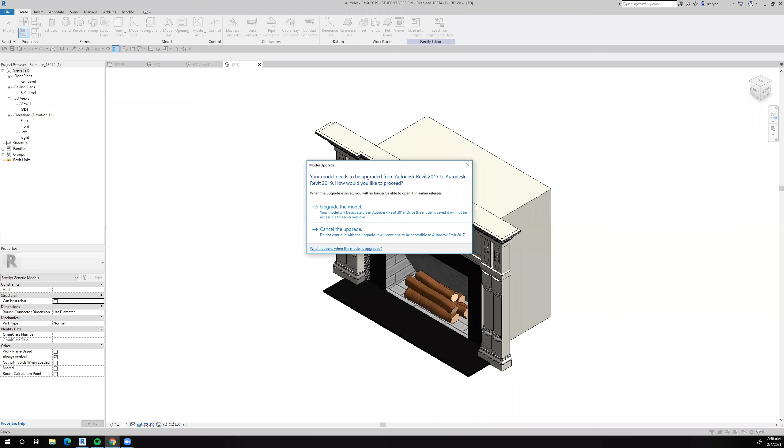And so Revit opens up the model and gives me an opportunity to look at it. And it looks pretty good for a fireplace. It has some nice detail—some logs, firebox, hearth, mantle, and the firebox itself, which looks pretty good. I like that. So I'm going to say load it into the project.

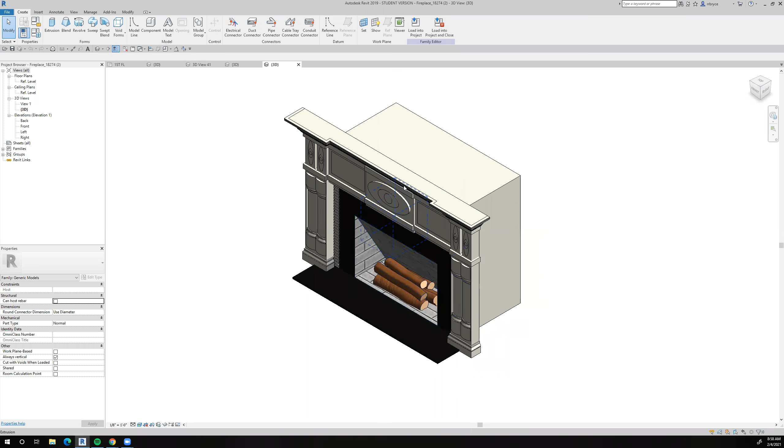I have a couple of projects open, so it's asking me which one I want to load it into, and it's this one, so I'll say okay. And Revit has automatically uploaded it and upgraded it. And now I have it available to put into my project.

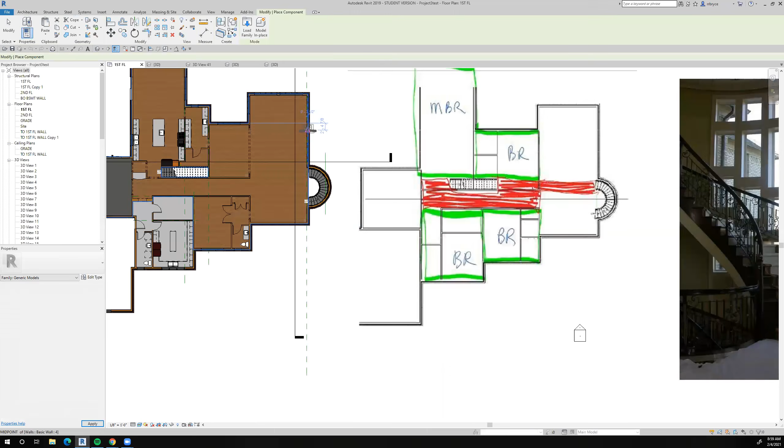So I'm hitting the space bar just to flip it around. And it looks like, well, it's backwards. So I'll hit the space bar again and again. That looks pretty good. Now, I think that's about where it's supposed to rest. I can take a look at it later to see.

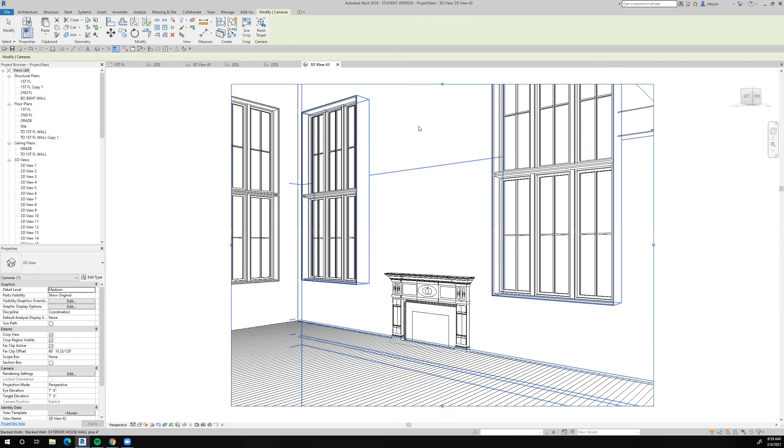So I'm going to take a picture. Let's see, I'll just come over here and grab the camera. I just want to check what it looks like right now in my model. Looks pretty good—I'm happy with that.

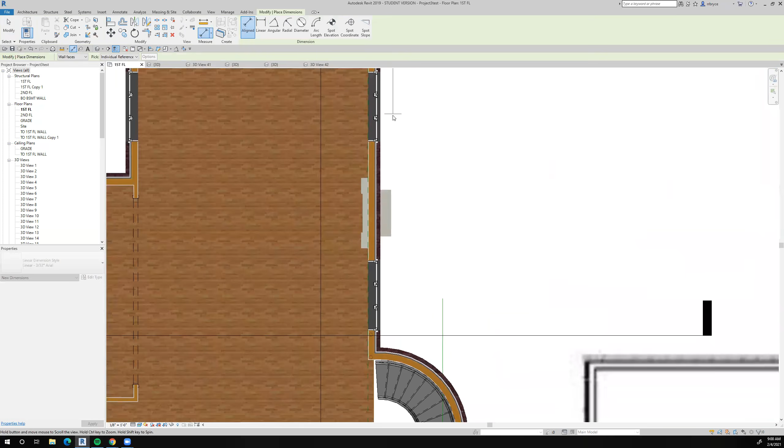I doubt that it's perfectly centered, so I'll go back to the first floor and decide where I want to center it. That's a good question on what I want to use as my point—I definitely want to use this as a point, and I want the midpoint of this guy. It should snap to the midpoint.

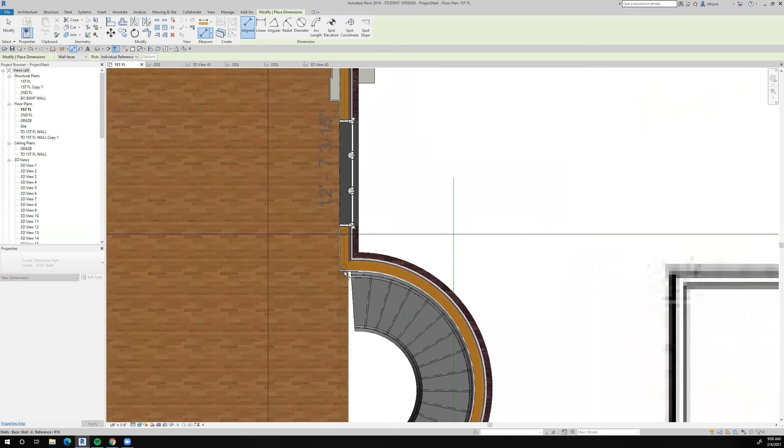It does. And now my question is, well, where's the other part that I want to use as a dimension? I think this might work right here as my other point. And I'll click there and say equal. Now my fireplace is equally centered between the—that's probably not right though.

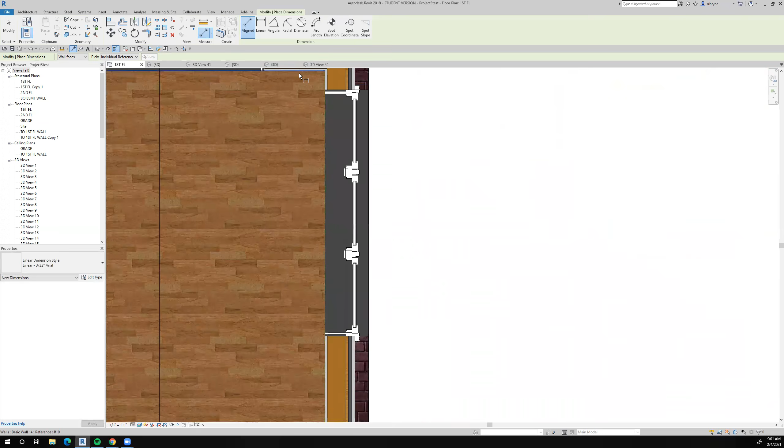I should probably do it from the inside. All right, so I'm going to delete that. And when I say the inside, I'm going to dimension from the inside face of the wall, because I want it to look centered on this wall. So that might be the better place to do it.

And then say, I'm looking for the equal. Sometimes it's hard to see it, but it's right there. All right, it's equalized—you can see the dimensions are exactly the same. Revit starts out by showing the EQ in the dimensions. You can see that. And if I want to actually see what the dimensions are, I click that little equal button again, and it shows me the actual dimensions. I can see that they are equal.

I'm going to—you notice on my cursor I have an icon that looks like a dimension, and that is telling me Revit is expecting me to put some dimensions in, that it's using the dimension command. So I'm going to hit escape to get rid of that. Now you can see next to the cursor that it's gone. Then I'll click on this guy and delete it, and everything looks good.

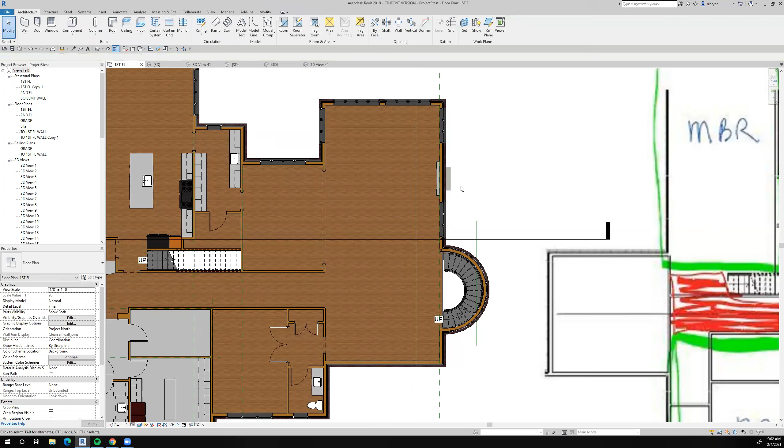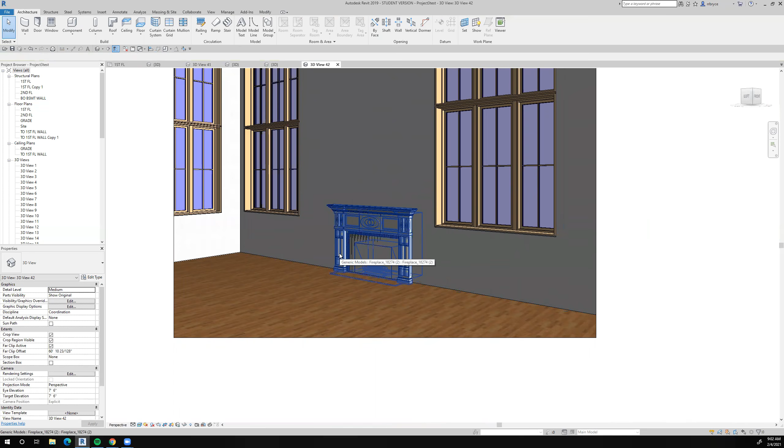From there, back to that 3D view. Now it's perfectly centered. It didn't cut an opening, I don't think, so I'm going to have to do that. Realistic—yeah, you can see that when these, most of the downloads from Revit City are not necessarily made to Revit standards.

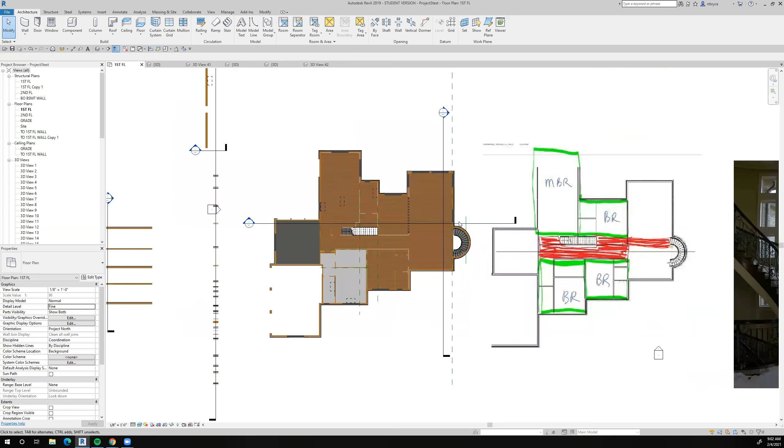So it would be more appropriate to have this fireplace actually cut the hole. You know, when you put a window in, it cuts a hole in the wall, and when you put the fireplace in, it cuts a hole in the wall too. But it's not doing that this time, so I'm going to go back to the first floor. I have this section right here. I'll go to that section and say go to view.

You can see that the gypsum board of this wall is going through the fireplace, so that's not going to work. So I'm going to click on that wall.

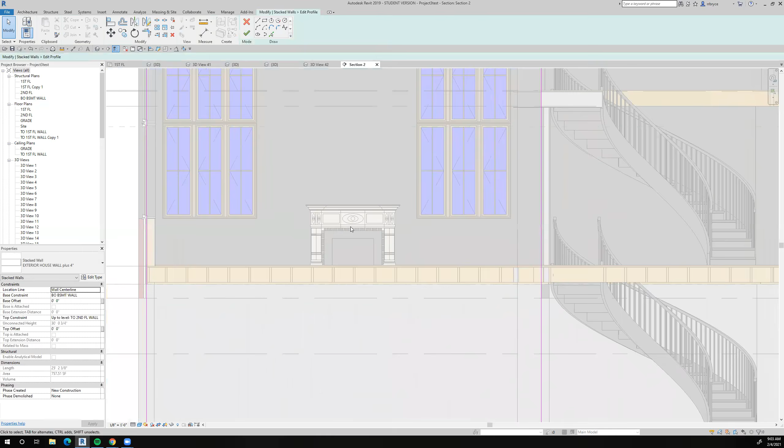I'm going to edit the profile, and I'm going to draw a rectangle. Now I'm going to take that rectangle from here down to here, and then say okay, let's see what happens when we do that.

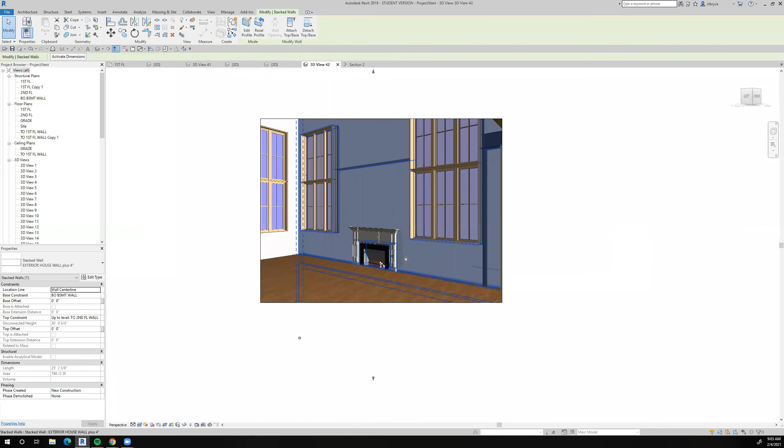Now, when we go back to that 3D view, you can see that Revit has successfully cut the opening for the fireplace, and it looks pretty good. What's this right here? Something weird's going on. No, it's gone now. Okay.

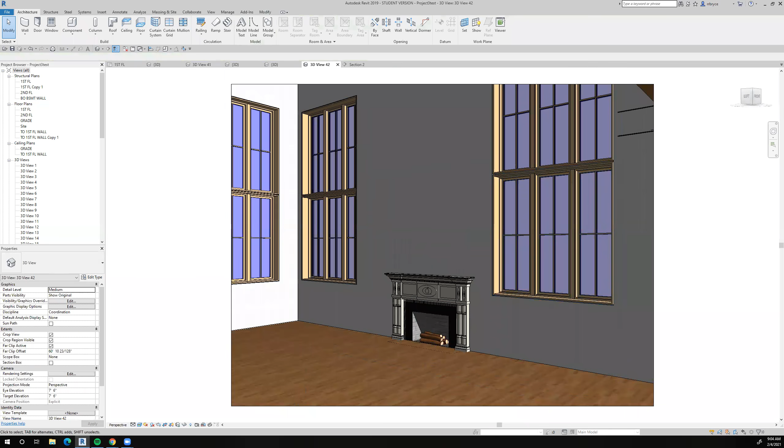So you can see what the fireplace looks like in this space now. When I put the ceiling in, I'm going to have to start rendering using light sources, which means I have to put lights in the ceiling for illumination to happen. But right now I don't have a ceiling here, so the sun is actually highlighting or illuminating this space.

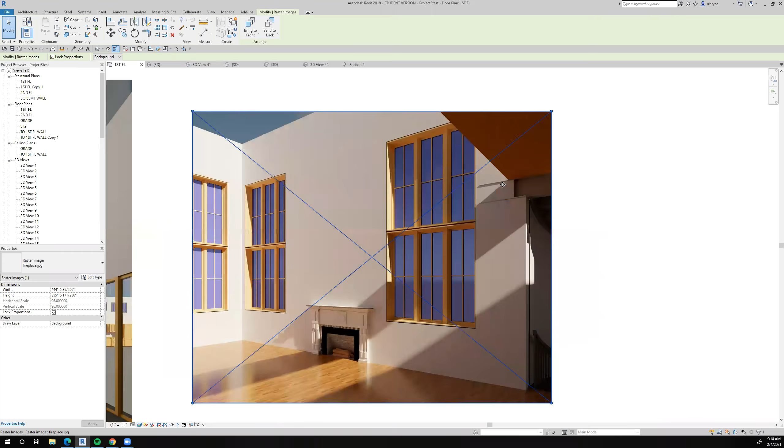And then if you remember from a previous tutorial, I said I had a steel beam in here that had a flange width that was too much. So another advantage of renderings is you can see the results of your efforts pretty quickly, and also some reminders of other things you need to do.

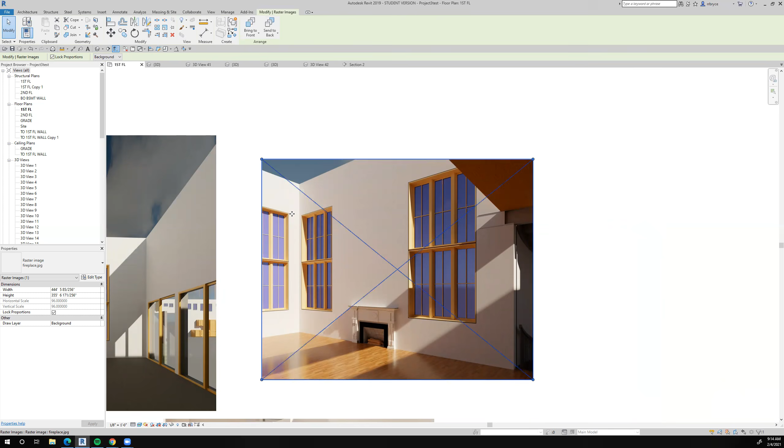What we're seeing right here is the bridge between the stairs and the rest of the house. So anyway, that's the fireplace tutorial. I put that in there correctly, I believe it's fine. I might change the materials because I think a natural wood would look a little bit nicer, I believe, or it could stay painted, either way. We'll have a separate tutorial on how to change the materials.

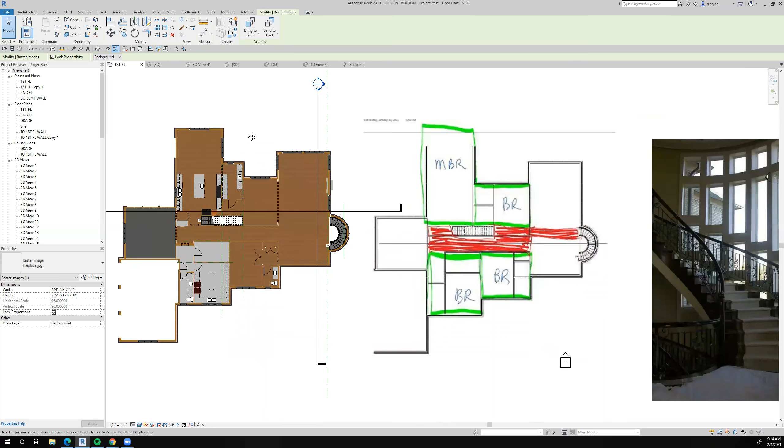But so far, as I look at this floor plan - and a good habit to get into, I think I've mentioned it before - I'm just looking at the floor plan to see what I like and what I don't like. And while I'm doing that, I can let Revit save in the background, giving it the opportunity to save my work up to date.

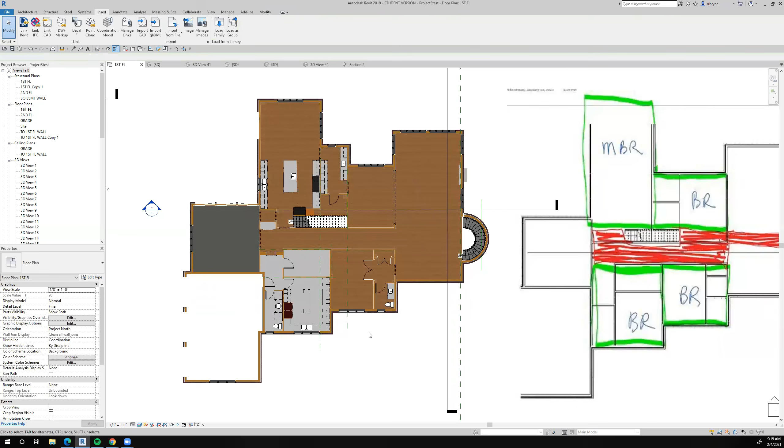So really we're just doing little bits and pieces of cleanup here. I don't see anything that needs to be addressed right here. There's an issue here - this wall should be coming all the way across to here. Let's see if it'll do that. Yep, there we go, that looks good.

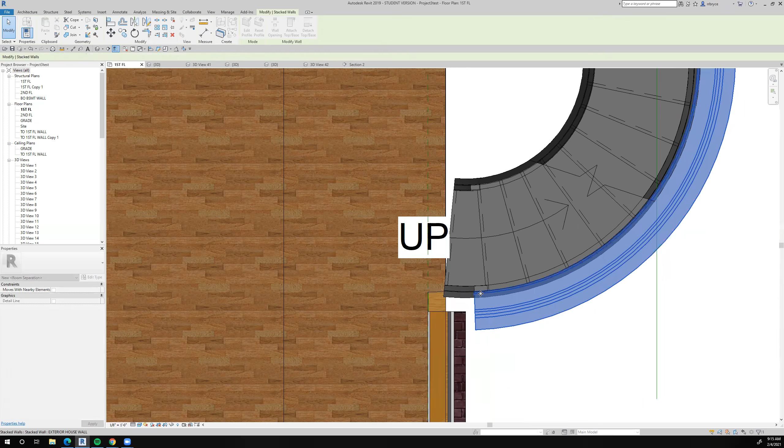Don't have that problem down here, but I do have this - I don't like that, with the stairs. I'm going to pull that back a little bit and take this straight wall and mirror it about the center of the stairs.

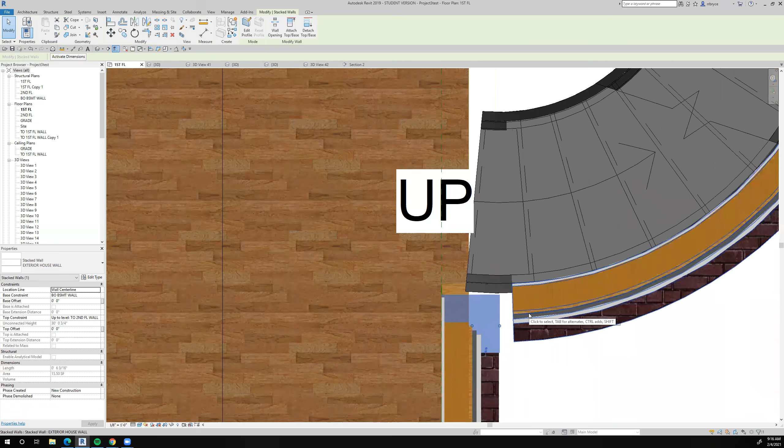So I will type SC to identify the center line, or the center point of the stairs, and then draw an imaginary line and unjoin the elements, and let's see what's going on here. Same thing. Oh, look at that.

I don't have these two guys lined up correctly. So let's see how that works if I align with this guy. Whoops, that's a radius - I don't want to align with the radius.

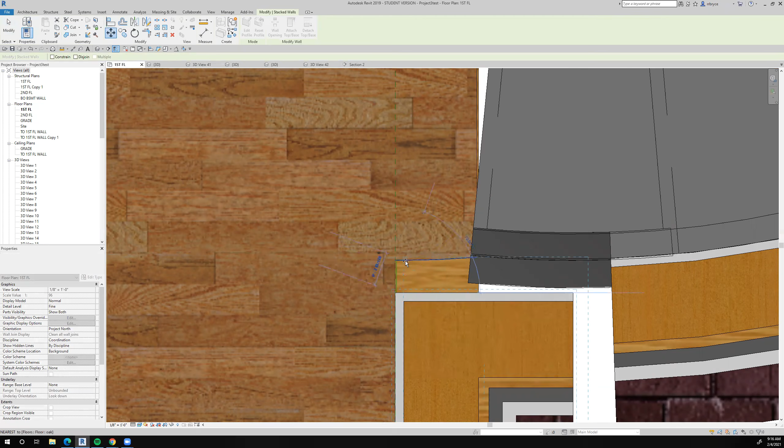All right, let's see. I'm going to - really, this might be, we're doing a fireplace tutorial, so I probably shouldn't be doing that right now. Let's see if we align these two. It's not going to let me do that.

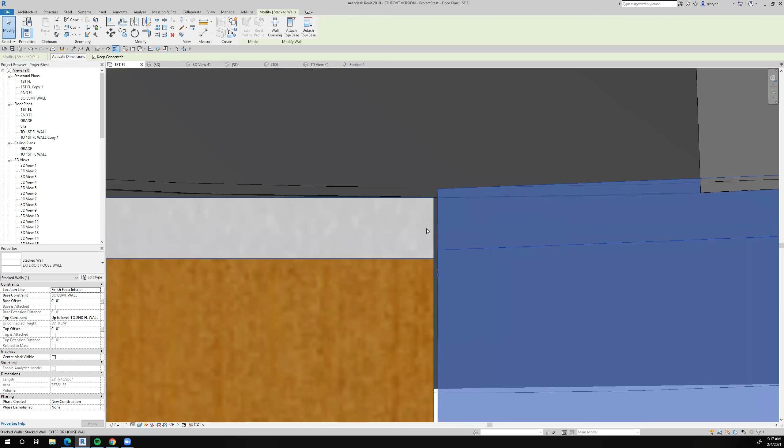So then I'm going to grab this guy and see if I can drag him over to here. Let's see what happens. It's close, but it's not exactly correct, so I need to do a little bit of work on that. I have other work to do on the stairs.

So this is the fireplace tutorial, I'm not going to go into that. Try to keep the tutorial short, although you might disagree that they're not short enough. But if I keep working on this right now, it will make this tutorial longer. So we'll stop right here.